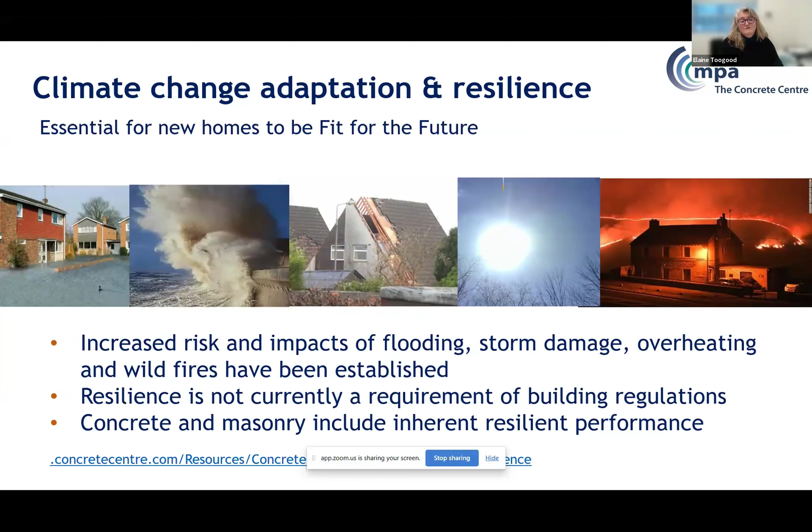But of course, quality, performance and sustainability isn't just there. There's a wide range, and we need to be reducing carbon emissions in new homes, through energy use but also through embodied carbon. That embodied carbon piece is, as you might expect, a real driver for innovation with regards to concrete. It's a big area that I'm going to be looking at in this presentation.

There is a huge amount of innovation taking place right now with regards to reducing the carbon footprint of concrete. Hopefully you're all aware there is a UK concrete and cement industry roadmap. It's been around for a few years now, published in October 2020, already building on good work that was already in place and in action. There's been good progress right across this whole range of seven technology levers that have been identified, all necessary to achieve beyond net zero by 2050.

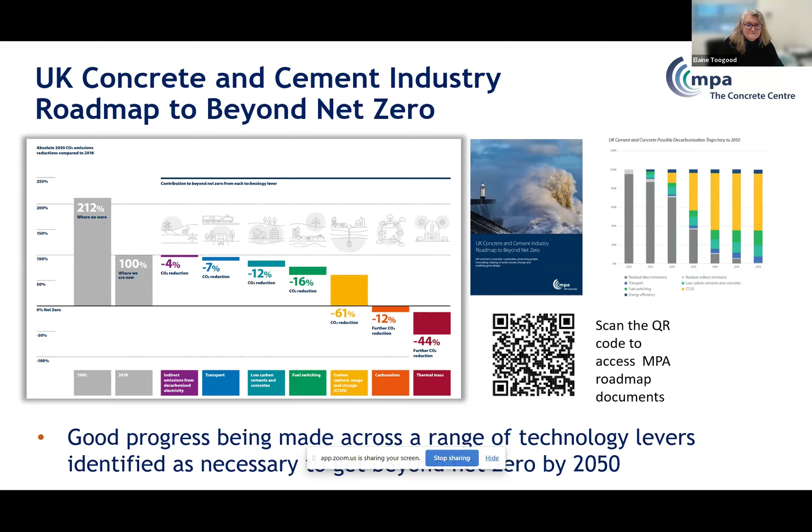So far, a 53% reduction in carbon since 1990 has been achieved by concrete in the UK. Of course, there's still more work to do, and there's going to be an update on progress published very soon. You can get a lot of the details about those different technology levers through the QR code on the slide. It's impossible to go through all the different action and innovation taking place, but I wanted to draw your attention to an article published just under a year ago. It's still a really good one to look up about the range of different things going on within the UK, and you can pick this up from our website.

In this presentation, I'm going to run through probably 5 or 6 themes of decarbonisation activity that's going on. So we'll do a quick fly through.

The first one is innovation in manufacture of Portland cement. Cement is the main thing that brings embodied carbon to concrete, so there's a lot of focus on activity related to cement. Aggregates, which are most of what concrete's made out of, are actually incredibly low in carbon and usually locally supplied.

In the manufacture of Portland cement, about 30% of the carbon associated with that is a result of the fuels being burned, since really high temperatures are needed. So fuel switching is one of the areas of early intervention the industry have been looking at. The latest figures available in 2022 show about 50% of the thermal input was provided by alternative fuels, a lot of them based on waste-derived fuels, switching away from fossil.

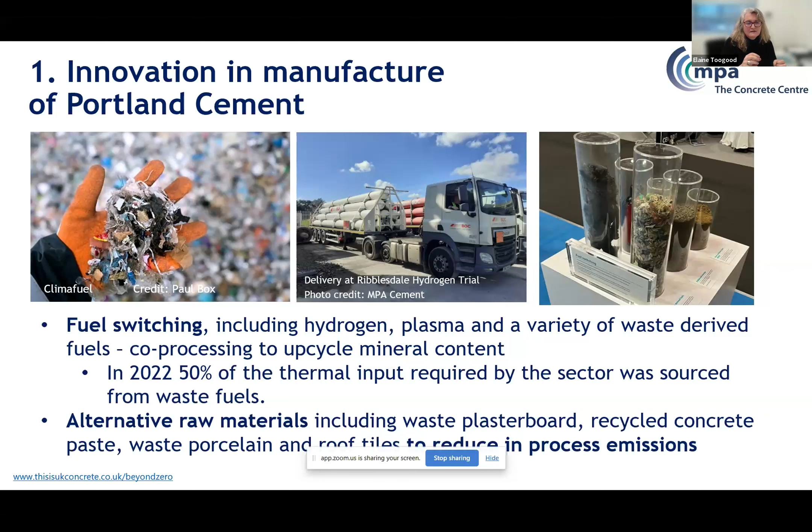It's not the only area of innovation with Portland cement. The other is alternative raw materials in the making of it, including waste plasterboard, recycled concrete, waste porcelain, and roof tiles, all to reduce those in-process emissions, changing the recipe of the making of the cement so there's less carbon produced in the process.

Now those process emissions are there due to the chemistry of making Portland cement, and at the moment they account for around 70% of the overall carbon emissions associated with it. So these are going to need to be captured - carbon capture, use, or storage is going to be necessary to reduce these.

A few years ago, this technology and innovation was seen as being quite futuristic, and a lot of people didn't really think it was coming off, but actually there has been significant recent progress in this. At the moment we are on track for the UK's first carbon capture cement plant to be up and running at Padeswood by 2029. Really exciting and really significant progress there as one of those levers for decarbonisation.

There are lots of other sites as well that have been identified, and there's a large amount of international collaboration to develop the technology for CCUS.

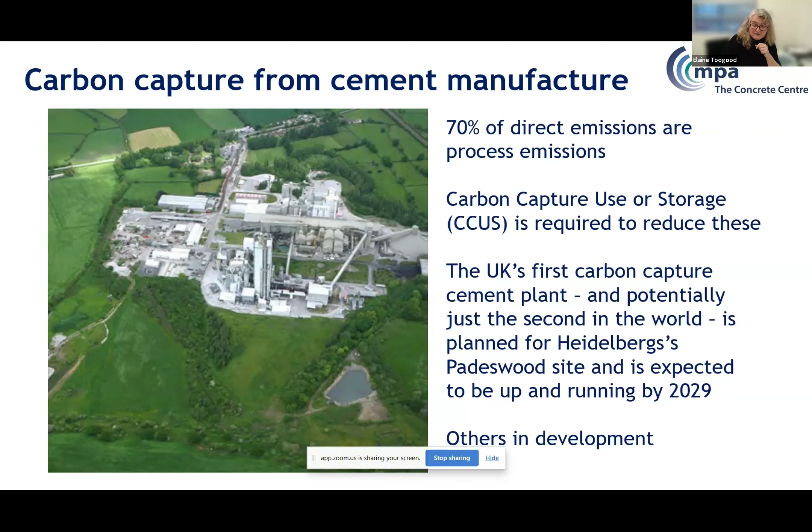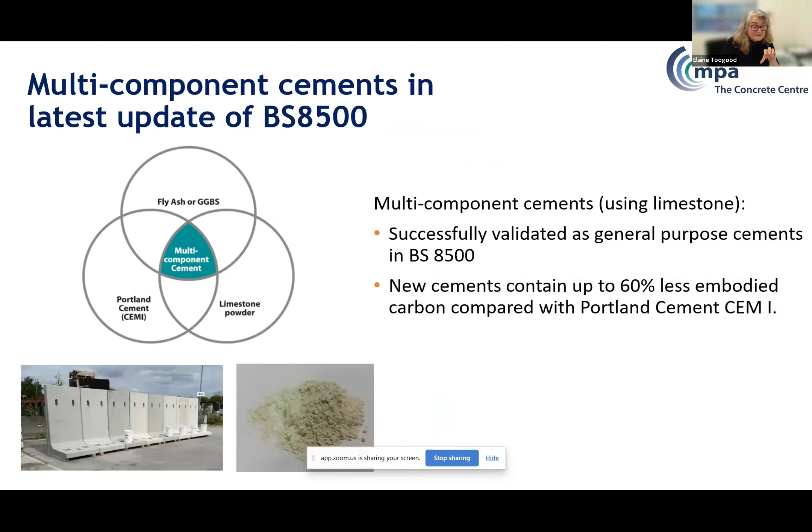The other area is in lower carbon cements and concretes. This is a hugely exciting area of technology. Recently there's been new cements available through BS EN 197-5, using limestone, which is less carbon - a different way of blending. There's different alternatives to reduce the amount of Portland cement by using limestone and either GGBS or fly ash.

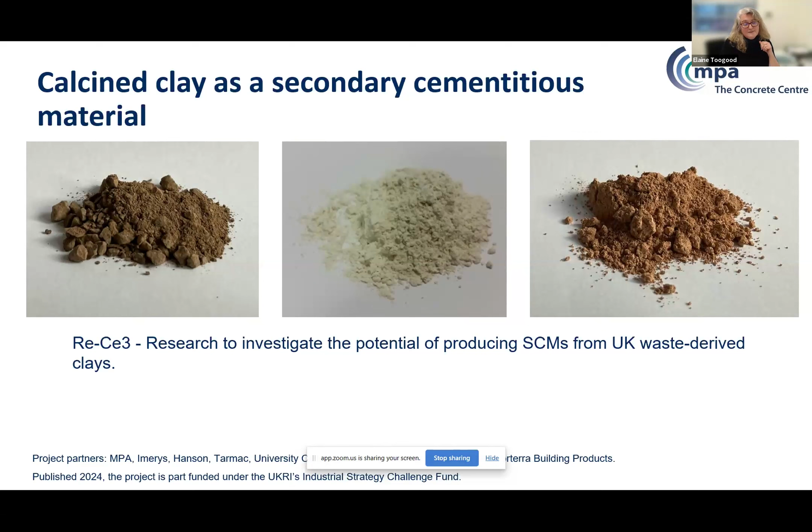Calcined clay is hot on the heels of that. There's another government-funded project that MPA have been running, looking at UK sources of reclaimed clay to be calcined and used as a potential alternative for expanding the range of lower carbon concretes available.

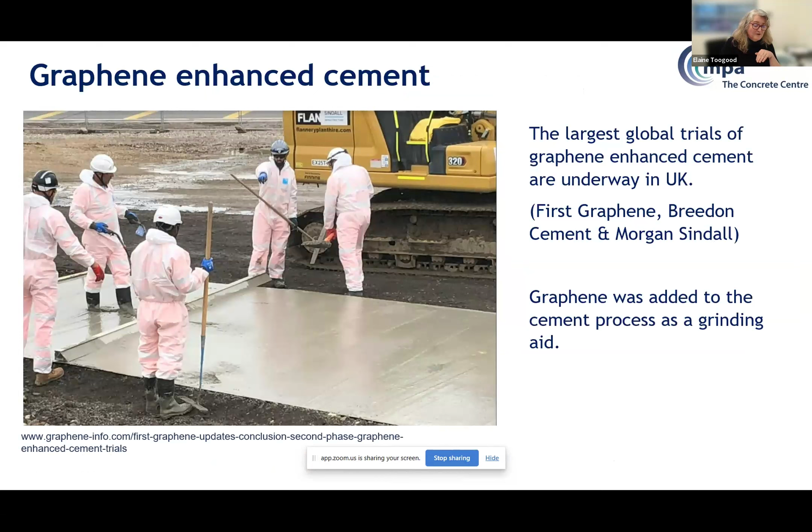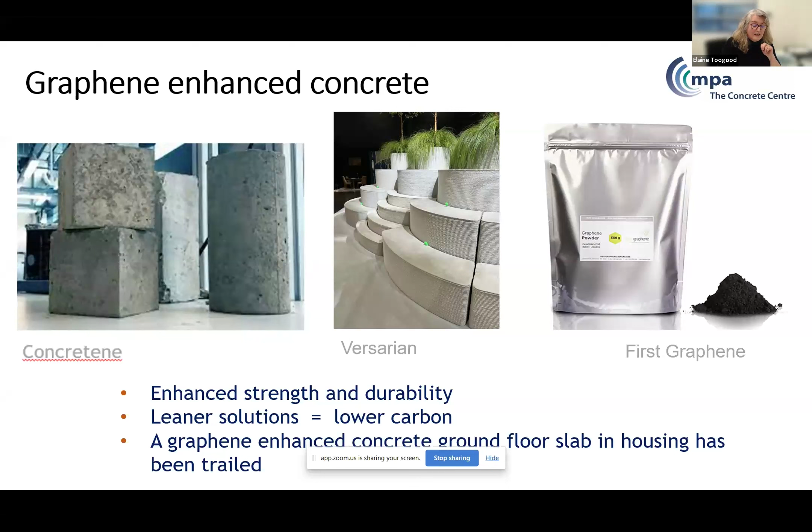Graphene enhancement is another area of interesting use. It improves the durability and strength of concrete, potentially providing leaner construction, so less carbon - whether in the making of the cement or as an admixture. There's some really interesting work done by a variety of people, and in fact there's been a concrete floor slab trialled in housing in the UK, as well as trials by some precasters using graphene enhanced concrete.

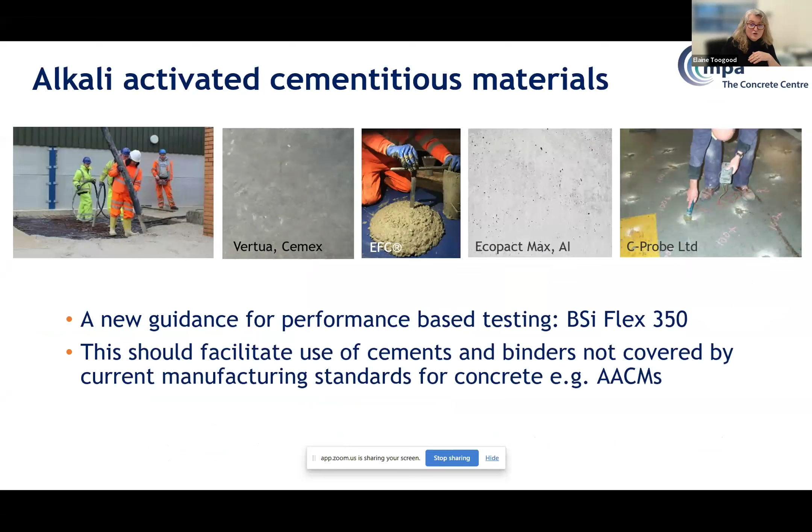There are alkali activated cementitious materials, another form of binder for concrete becoming more available, and there's a new BSI Flex guidance that's been provided to help and facilitate the use of these types of cements, which are non-standard and not covered by current concrete standards.

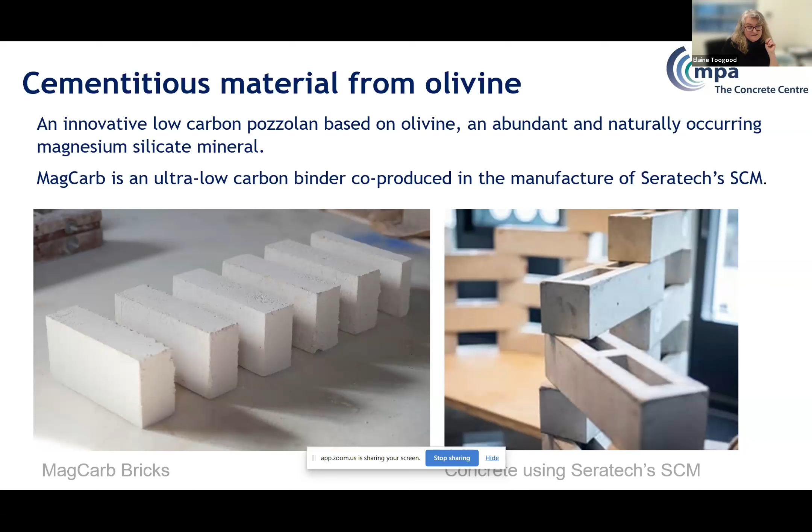But there's also research and some trials starting for different technologies, different bases for binders, including Seratech's use of olivine as a raw material - a completely different technology as a basis for cementitious material potentially usable in concrete.

There's also new uses for recycled concrete, a really interesting area of activity - whether that's crushing the concrete at the end of its life to tap into its carbon capture potential, enhancing aggregates for use within concrete, or brand new concrete products being developed, such as that produced by Cambridge Electric Cement.

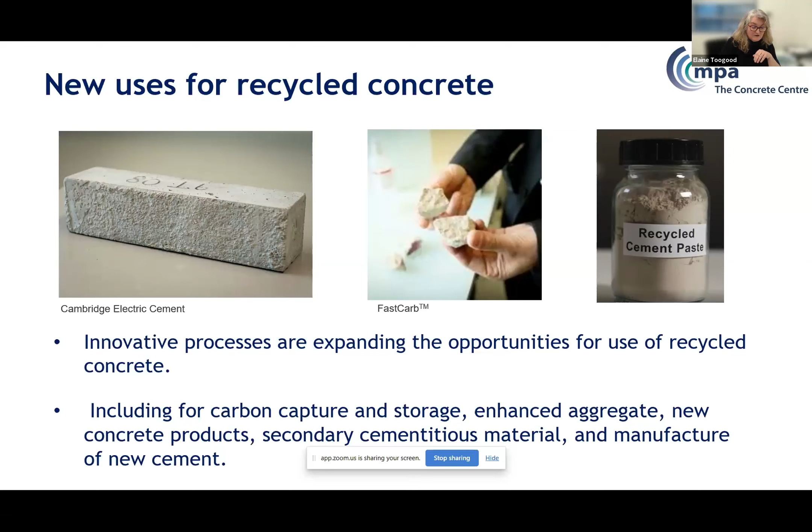There's also potentially lots of research going into recycled cement being used as a secondary cementitious material and in the manufacture of new cement as well. So a very exciting area of work that's going to reduce the carbon footprint for all concretes potentially, and that would impact on reducing the carbon footprint of housing in turn as well.

Another area is innovative industrial carbonation techniques. That's about actually permanently embedding captured CO2 into the concrete as part of the manufacture. It's another area of work.

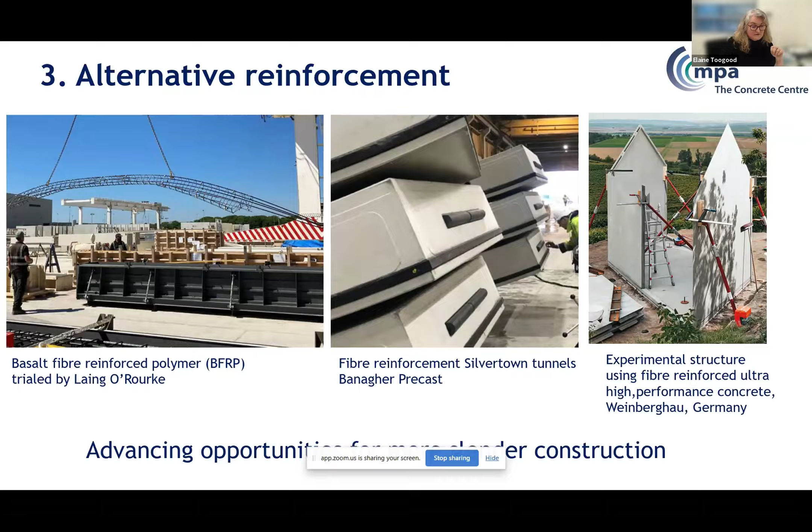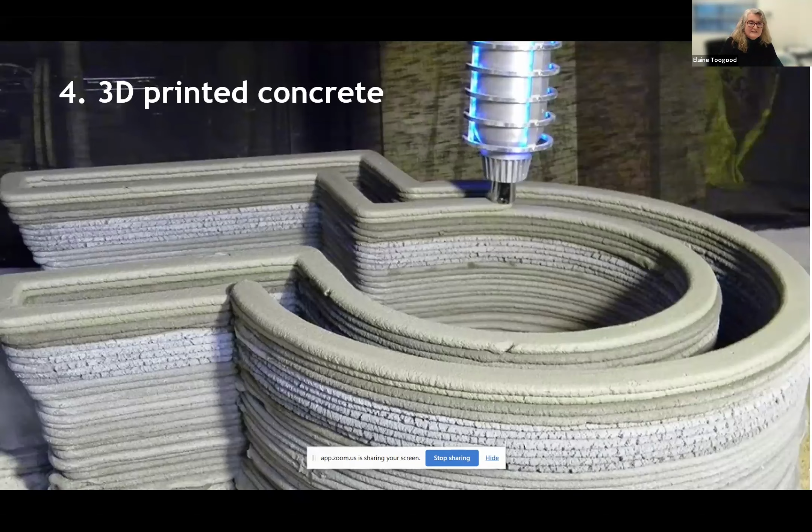There's so much more we could be talking about, but we don't have time. So the third one is alternative reinforcement. Really interesting—if we can get alternative reinforcements in there, there's real potential for leaner forms of construction. There's lots of research taking place by MPA members of precast looking into getting more slender solutions by alternative reinforcements. 3D printing, everybody—obviously that's usually the first thing people think of when they say, I'm looking at innovative concrete. It's a completely different way of transforming how we place concrete as well as make it.

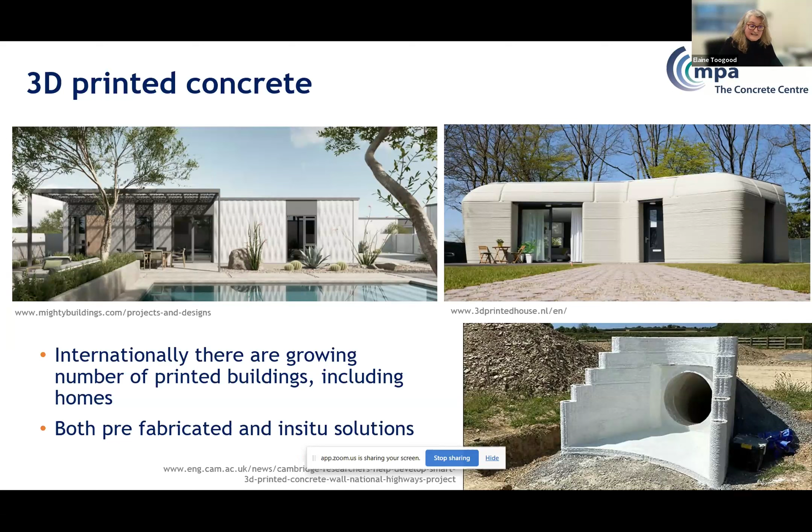Now, in the UK at the moment, there haven't been any homes built with this, or certainly not that I'm aware of—if anybody knows, tell me. But there has been a growing number of printed buildings and homes internationally, including both prefabricated 3D printing and in situ solutions. In the UK there have been some trials for infrastructure—this really complex bit of concrete that's been installed in Cornwall in 2023, and some other inspection chambers and things being manufactured. So it's a really interesting area of evolution, and I'd be remiss not to include it in this talk.

But my final and fifth innovation relates to digital technology. This could be AI and machine learning in manufacturing and construction. I'm not going to go into great detail because Dan is going to focus on some of the ways the PC have been using this within construction. But it's a really important area and thread for enabling other technologies as well—whether that's about digital sensors being embedded within the concrete at the point of curing to facilitate early striking of some of these lower carbon concretes.

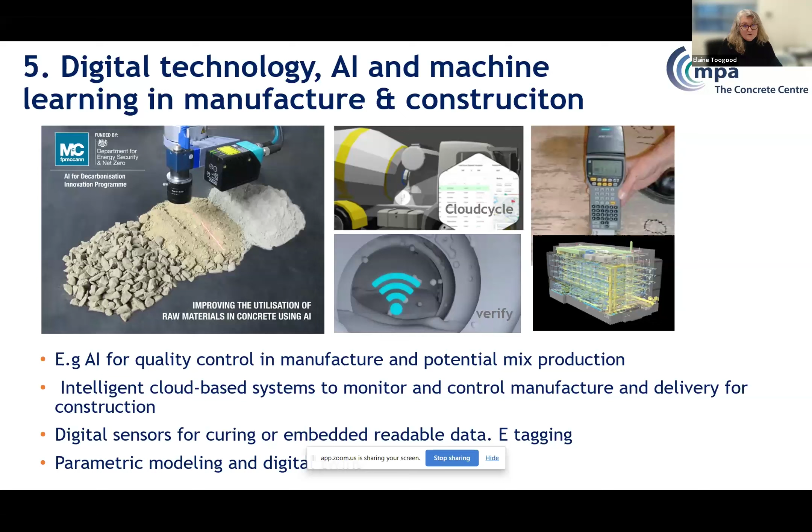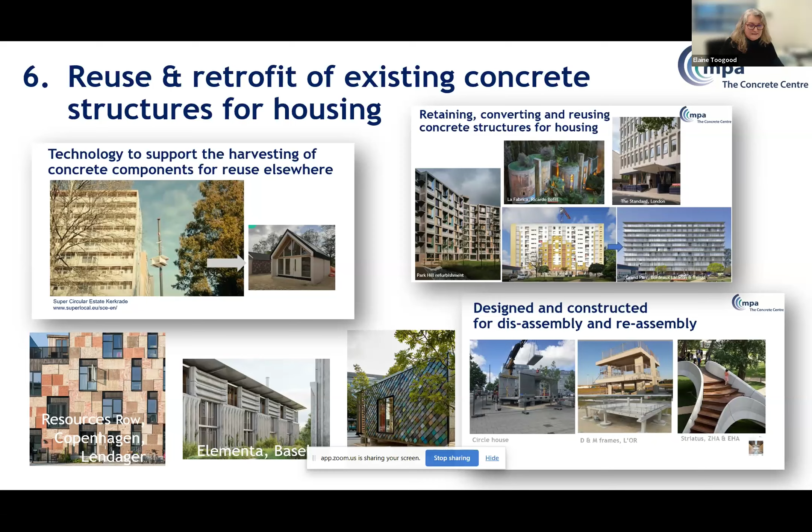I'd like to, but don't really have time to go into other circular economy areas of interest. But I just wanted to put this one in because, of course, if we are going to be tackling this housing solution, we need to get better at reusing the existing structures that we have right now. There's lots of really exciting stuff going on in terms of ways we can be harvesting existing concrete components, retaining and converting structures, and designing in the first place to enable their longevity or disassembly and reassembly. So it's a really exciting area of research that can impact on the way that we build homes.

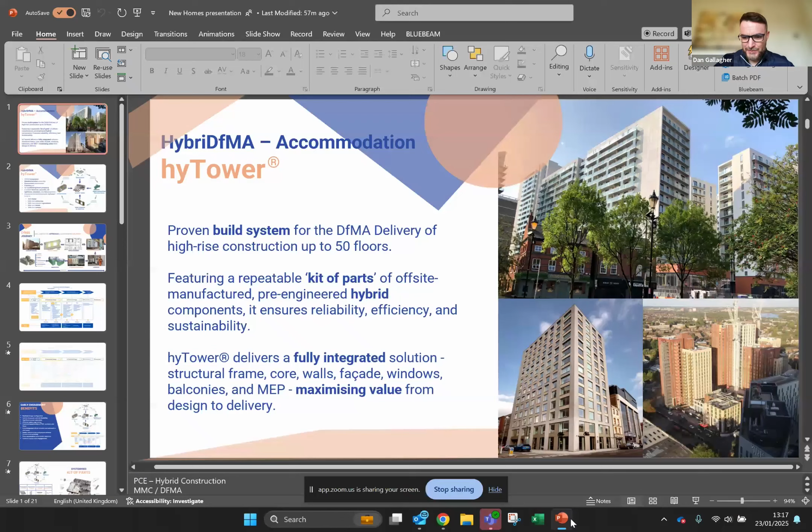Okay, thank you very much. Thank you for the invitation and opportunity to talk today. As Elaine has alluded to, the housing crisis dictates lots of different solutions, and we're just going to give you a snippet of what our solution looks like and how we bring accommodation utilising hybrid DFMA solutions. So our solution for this is something called a hyTower solution, which enabled us to develop and bring high-rise accommodation utilising a kit of parts approach.

For those that may not be aware, hybrid DFMA is the blend of a lot of precast concrete, which is what we have historically done, but utilising lots of different materiality as well in order to bring the right solution to the project. DFMA is designed for manufacture and assembly, which knits quite nicely into modern methods of construction, or MMC as it's predominantly called, where units are manufactured off-site, brought to site, and then ultimately put together like Lego. Traditional building obviously has a place, but this is a more modern form of construction which addresses a lot of the concerns that Elaine mentioned, particularly with regards to acoustics and thermals and things like that.

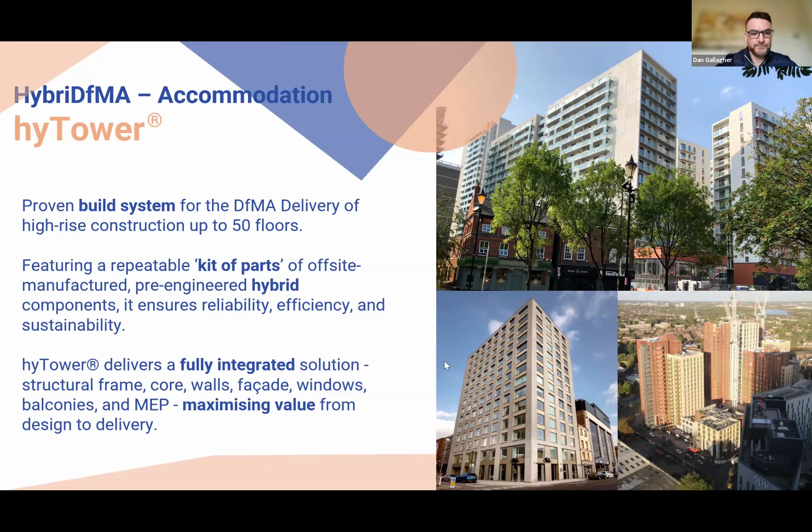So a little bit more about the hyTower system specifically. It's founded on a kit of parts approach, as I touched on. We pick our units from a systemized library. We then utilize digital technology to track those units throughout the concept design stage, into detailed design, throughout the manufacturing processes, and then as they get to site, tracking where they go in and where they get installed, along with all the QA around that.

This is in order to make sure we've got that golden thread and single source of truth, which I'll touch on a little bit later. As I've already touched on, the thermals and acoustics are a natural byproduct of concrete, and we like to think that we also bring a lot more to the party in terms of air tightness. So passive house standards are something we can achieve using our system, as well as deploying it in areas like hospitals or research facilities that have high specifications for things like vibration.

What we tend to find is that over traditional builds, we're up to 50% faster in terms of on-site activities. It does dictate that a lot more work has to be done off-site earlier, so that sometimes changes things like funding models, and people have to come with the right type of mentality in order to deploy a DFMA solution. But we're also then able to deploy fewer deliveries to site, reducing carbon footprints and disturbances to neighbours in tight inner city areas and what have you.

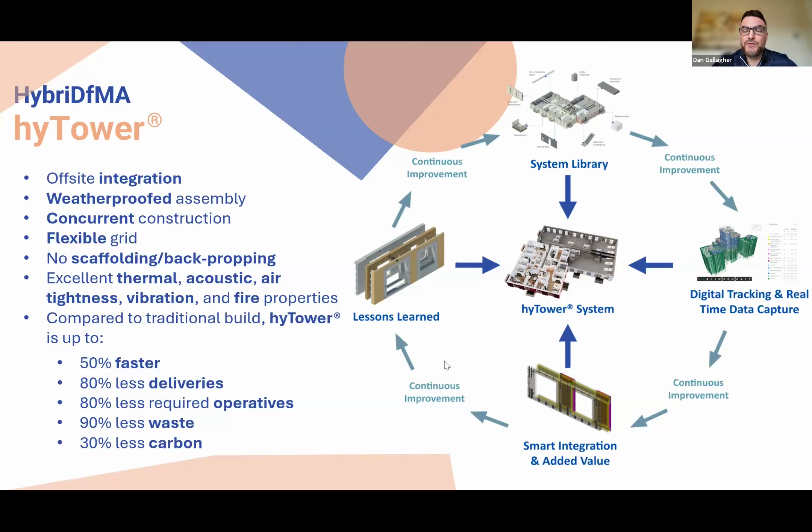So as a brief overview of what this DFMA journey looks like, we like to get involved nice and early, as I've touched on. That enables us to talk to the client team and the wider design team, and ensure there's no decisions taken which funnel us down the wrong avenue, where we're trying to put a square peg in a round hole with regards to a traditional build versus trying to deploy a DFMA solution as best we can.

We do a spatial design in order to make sure we're hitting the architectural and engineering intent, and then move that through stage 4 into detailed design, at which point we produce shop drawings. That goes into a manufacturing environment where those units are produced off-site, QA'd, and tracked digitally until it's ready for on-site, transported to site in a controlled fashion, in line with the build sequence that has been pre-developed.

And then we have the lifting and installation sequencing on site, which is a systemized approach, enabling us to hit cycle times that often start a little bit slower. But once everybody understands how things come together and the predictability factor kicks in, those cycle times decrease over time until the building is complete. And then we have the handovers for the end client.

And because of that digital twin technology which we deploy and that traceability, the birth certificate that stays with every unit from the spatial design stage right through to the handover stage will track everything from the materiality, who manufactured it, what's been cast into it if it's a precast piece of concrete, all of the structural tie connections, if there's any remedials, and its specific geolocation on site, so that everybody understands the full history of that unit until it's in its final resting place.

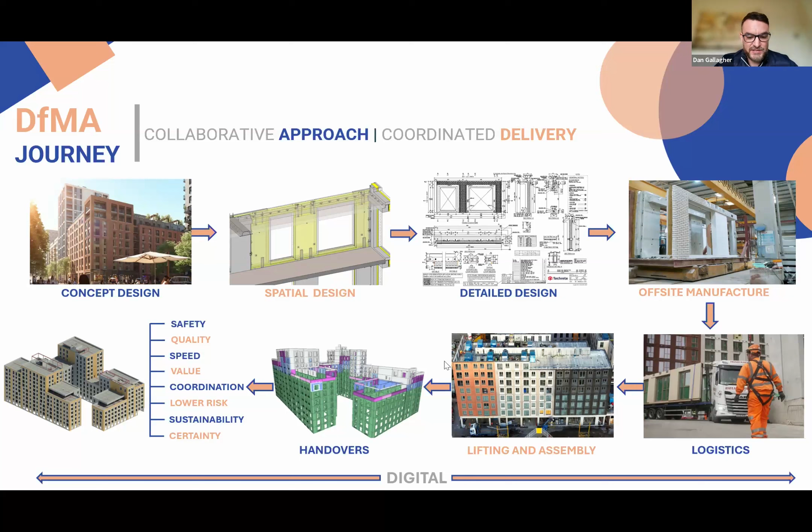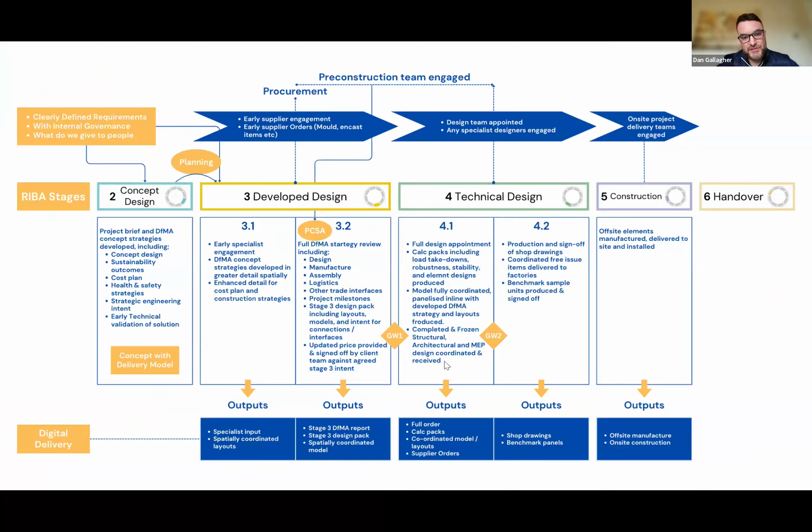So this is, for those familiar with it, the RIBA stages of work. Most people are familiar with these stages, so I'm not going to go into too much detail, but the thing I really want to hone in on is that whilst people understand the RIBA stages of work, not everybody is aware that there is a DFMA overlay for the RIBA stages of work, which is specific to deploying an offsite strategy.

We feel it's absolutely key that we get involved as early as possible in order to fully harness all of the benefits of a DFMA strategy, so that we can then go through the developed design, the manufacturing strategy, and the on-site assembly strategy with all of the positives that can be deployed from an MMC solution.

As I've already touched on with some of these benefits, we do optimize the design. We feel we can look at other avenues, as Elaine has touched on, better forms of concrete where it's practical. We can look at reinforcing, or only providing reinforcement in areas required based on the strengths needed, rather than traditional reinforcement everywhere that might be to a particular standard. So that enables us to really drive down reinforcement contents.

We've got the waste reduction, which I've already touched on. We value engineer, which is often something that is challenging on a project when people are trying to drive down costs or understand how they maximize what they're paying for.

That added value and coordination piece enables us to cast things into our precast products that then facilitate follow-on trades. So we put the openings in our units that allow the ductwork to come through, that have been predefined, fire stopped. We have single risers that get dropped into place, so it's a single plug and play system. And we really do that by buying everybody into the team and being able to get them on board with that DFMA strategy.

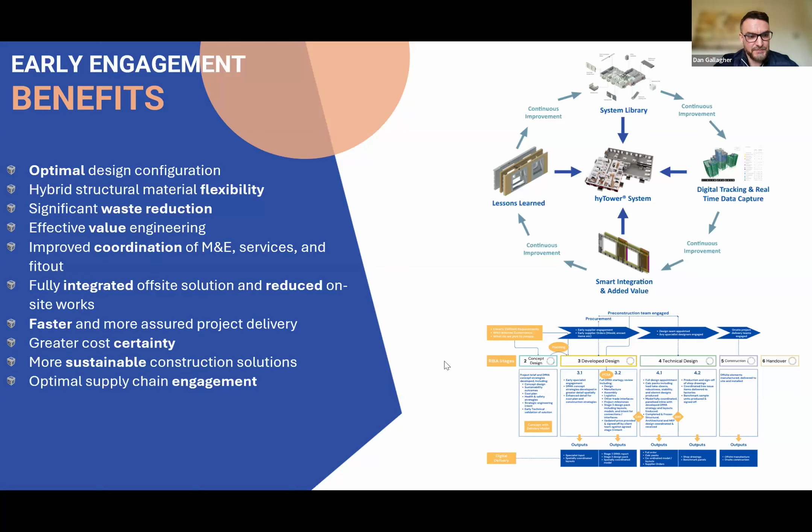The real strength of being a hybrid DFMA solution is that whilst inherently precast concrete has an awful lot going for it, one size never always fits all, unfortunately, and we recognise that. And because we don't own any manufacturing facilities, we instead rely on the supply chain and the good relationships that we have. We're able to procure the products we need and put them in the right place at the right time, so that we're putting our best foot forward for project delivery.

So that sometimes emanates in terms of precast concrete beams and precast concrete slabs, but it could also be timber, it could also be composite beams. We're not really hamstrung by doing it one way. We instead look at all the credentials of pulling all of the kit of parts together in order to get to the best solution possible.

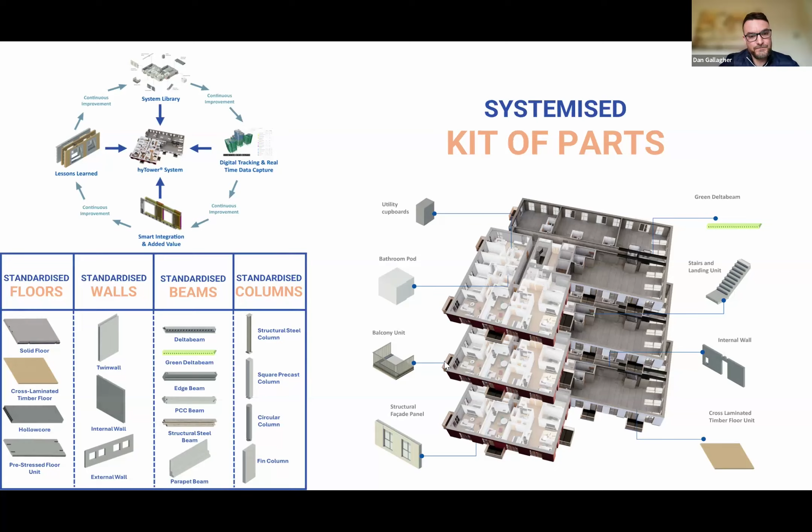That systemized approach and the predictability it brings means we're picking things out of a catalogue that have been tried and tested. They've been through thermal, fire, water, acoustic testing, air tightness and vibration testing, and we're able to demonstrate, validate and verify to our clients that what they're purchasing is fit for purpose. And we have all the traceability throughout the digital twin tracking in order to justify that.

The integrated systems, the facades can be brick, concrete, coloured concrete, or patinated concrete. We're able to install the windows into the panels as well, which gets away from any scaffolding around the outside because it's an integrated part of the system.

Integration with the MEP, as I've already touched on, casting things in or facilitating underfloor heating being in place, so it's just tested on site rather than off-site. And then we can drop in pods or risers while we're building, so we've got fewer trades on site. We're not bringing other people in, so the client only has to deal with us, and we're bringing that added value. We're also able to install things like balconies and roofing at the same time, which drives down that manpower on site.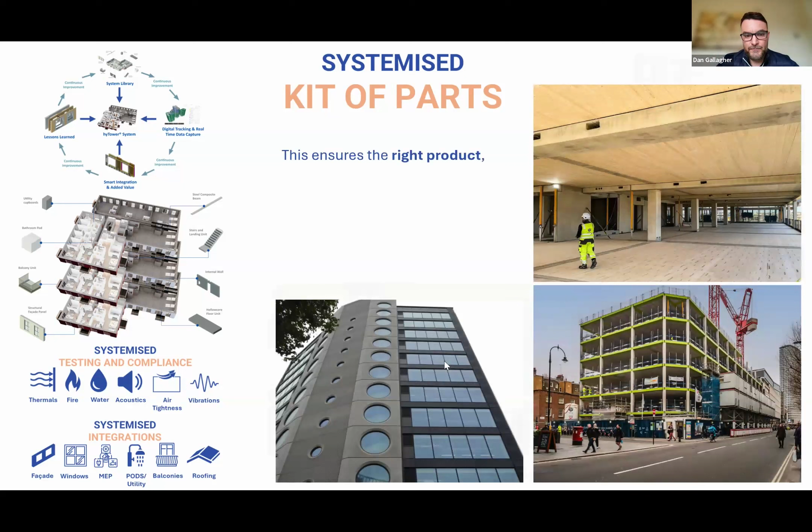So as I've touched on, that enables us to get to a place where we're putting the right products in the right place, doing it to the right standards. We have data backing up our solutions, making sure they're fit for purpose and robust. As Elaine touched on, we want solutions that can stand the test of time.

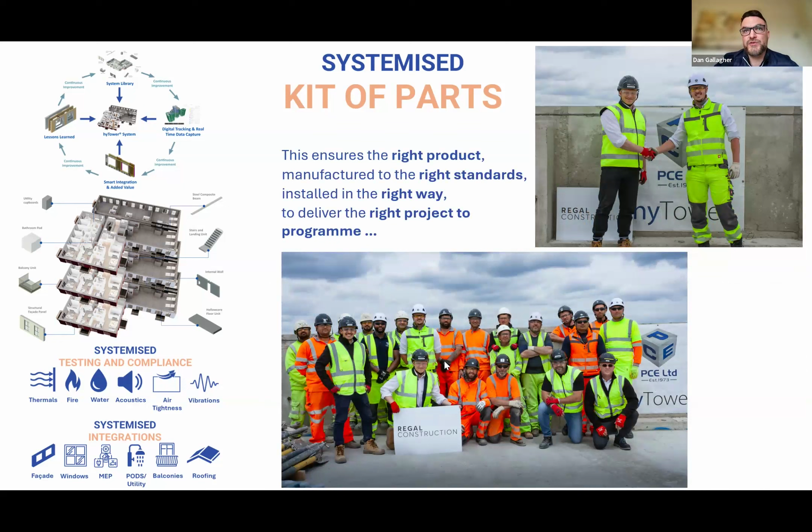And then we're able to track it all and provide transparency to our clients through digital traceability. So just touching on that digital twin visibility, this is something we've developed in-house because we're absolutely adamant that we don't just want to utilize it for our own benefits. We want to give that transparency to the client team so they understand whether we're on program, where problems might be, but more importantly, how we're progressing with regards to the program, so they can start thinking about those follow-on trades in order to reduce the overall times for on-site activities.

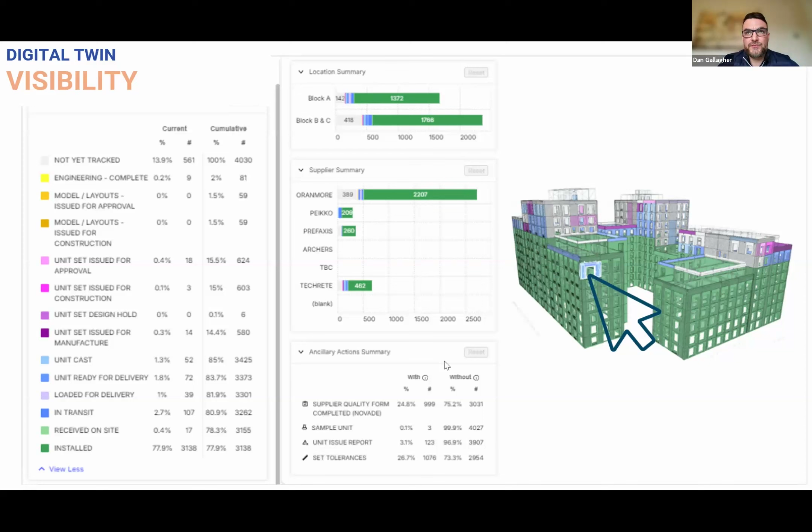And we do that using a system called Winomia, which takes elemental pieces of the overall structure and tracks them throughout the design process, the manufacturing process, and the on-site process. So in this instance specifically, we can click on one unit and have the full history of that unit with regards to the journey it's been on through its manufacturing and design process until it gets to site.

This is all done in a digital twin. So as people are quite familiar with 3D technology these days, you can rotate, zoom in, find the unit specifically you're looking for, click on it, and it will expand out, giving you imagery with regards to that journey it's been on, and all the details about it.

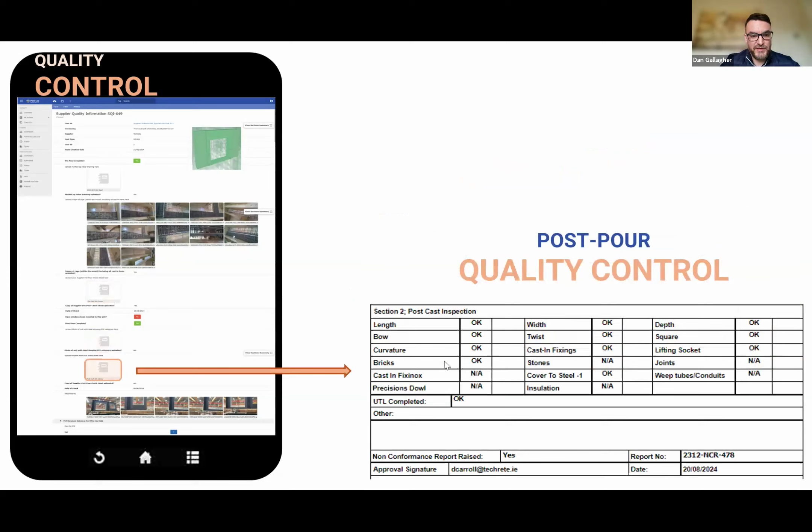And then it can give all your documentation that sits behind it as well, whether that's the quality control, the photos, or the sign-offs, just to validate that it's ready to come to site and can be installed. And that's the full digital twin technology throughout all three parts of the project: your design, your manufacture, and your construction.

And we really feel that in order to do that, if ever we need to come back and find information through O&M manuals, rather than trying to find paperwork or individuals, it all resides within a 3D environment where people are free to go and find that information, whether it's design related, quality related, structural integrity, or fire related.

So all of that enables us to have a single source of truth which aligns to Gateway 2, making sure everybody understands where they're going in order to find the information they require for their project. It's visualized, so it's easily accessible. Throughout project delivery itself, it gives real-time insights and visibility client side, so people can understand how their projects are progressing. And that enables us on site to have a comprehensive management tool for understanding where we need to focus our attentions at any given time.

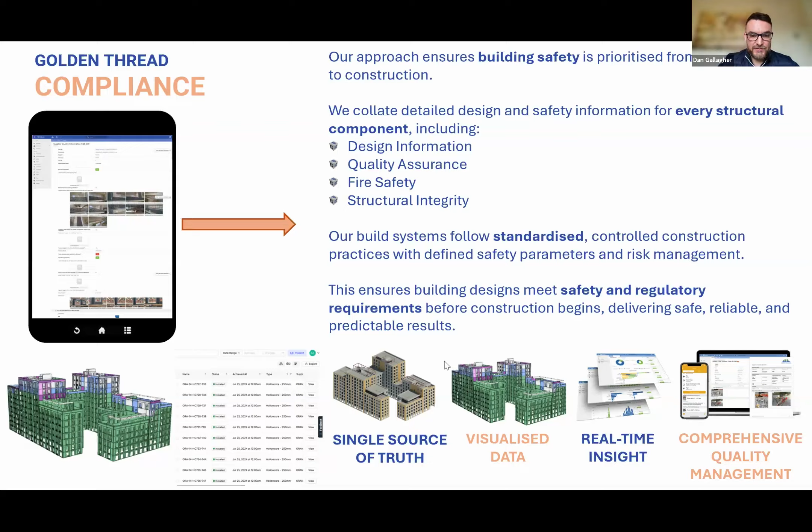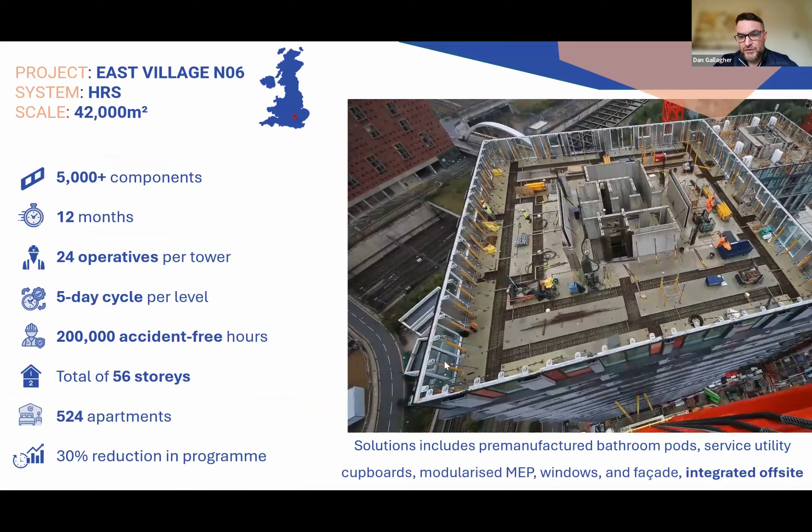Just a few working examples now. This one is a project that has already been delivered. The video on the right-hand side demonstrates those cycle times I spoke about, with the repetitive nature of things being installed. You'll be able to see the core in the middle, and you can see some pods being dropped in with that added value piece.

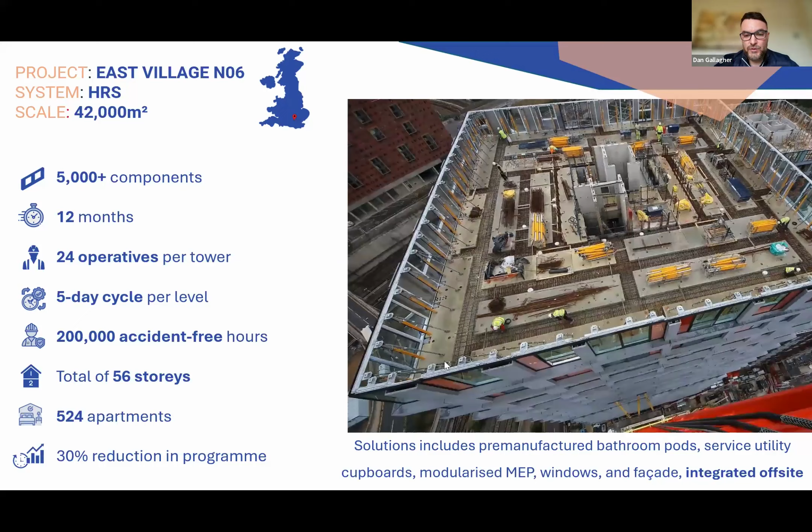This is a high-rise residential scheme called N06, East Village in London. This had over 5,000 components and took only 24 operatives to build, delivering 524 apartments. Over the original scheme, which was an in-situ scheme, the client confirmed that we were 30% quicker than if they had gone with a traditional build solution.

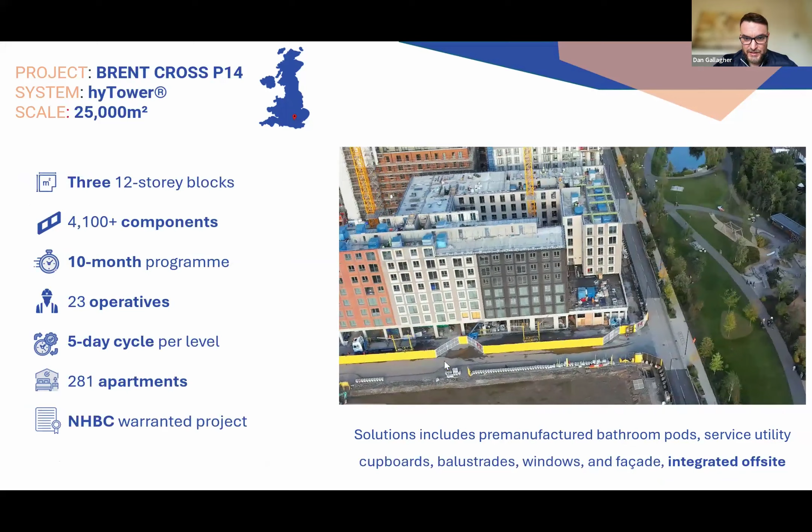Again, this is another residential scheme. It's currently being built and we're just completing it down at Brent Cross. You can see the various different facade types that we've got on it. So this is really us being able to maximise the architectural intent that the architect was trying to achieve.

As we pan around to the right-hand side, you can see more traditional builds on the right-hand side versus the building on the left-hand side, which is ours, where we don't need external scaffolding, we don't need the vapour barriers, and we don't need brick slips being installed after, because that's all part of the integrated solution.

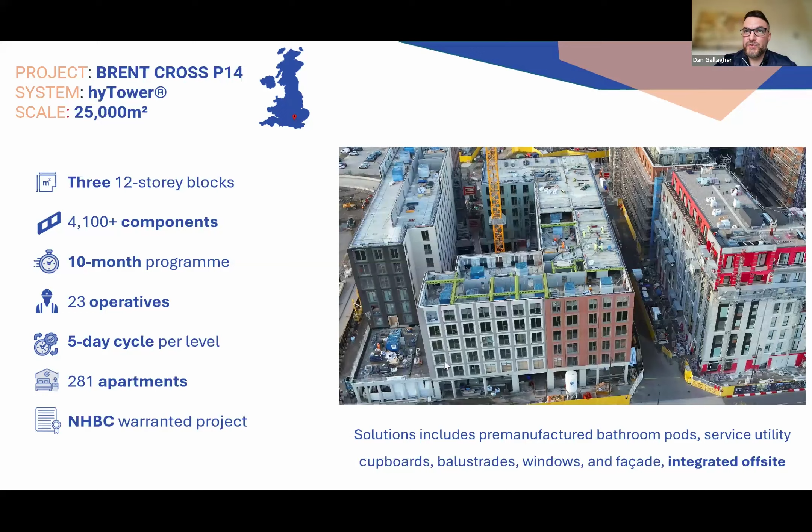This was a 10-month programme. Again, only 23 operatives being delivered on site. It was NHBC warranted, so we went through a lot of testing with regards to air pressure, wind, water, again, as Elaine touched on, making sure that it's a robust form of construction that the client was looking to procure from us.

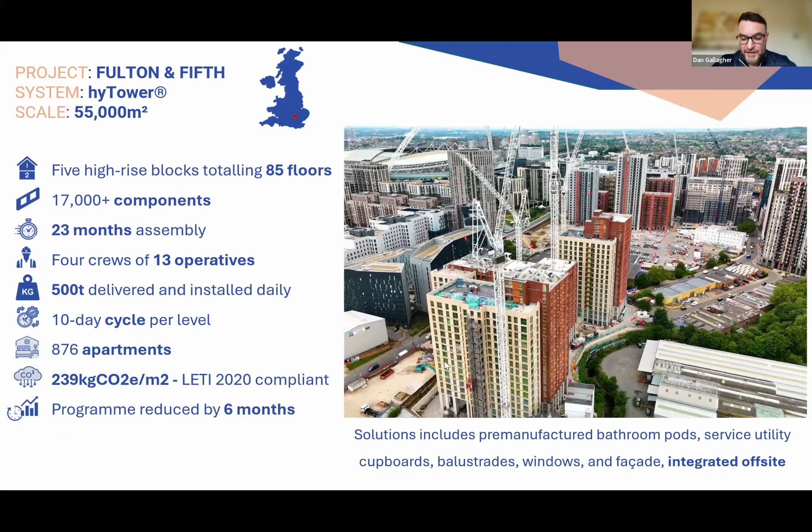Again, another project in the centre of Wembley. We've got the Wembley Arch in the background. This is five towers that we're currently delivering. It's a 10-day cycle typically for being able to go from level to level. So we've really refined the ability to build with speed and certainty.

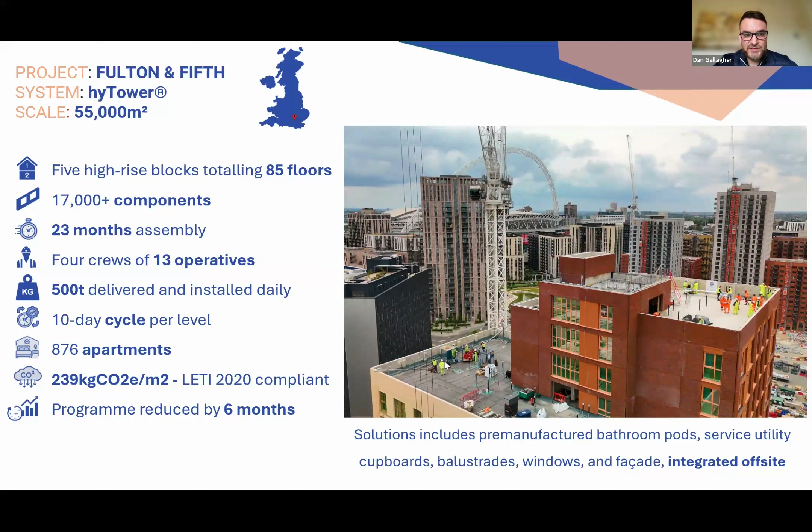And we're on site for about 23 months, installing just over 17,000 components. And then finally, just a bit of a digital representation there on the first image, and then a cycle showing how we've delivered a project called Silvertown Plot 6. This encompassed some affordable accommodation as well as some shops and office space and what have you. So there's lots of different ways that we can try and answer this housing crisis, and we've got a lot of solutions in hand and innovation that's ongoing in order to try and do that.

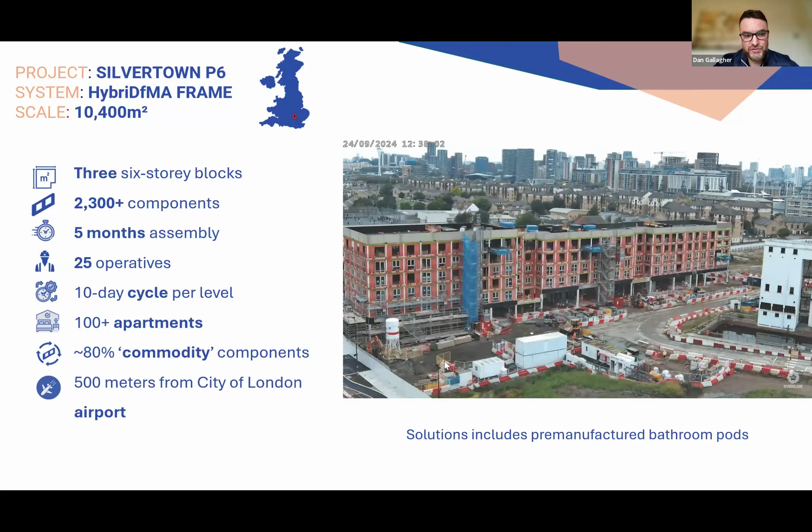And that's me. I'd be more than happy to take any questions. Thank you for your time.

Thanks, Dan. I think that was brilliant. Lots of really good stuff there. I think Laura might have dropped off the screen, so I think it's going to be you and me having a chat about this and seeing if we can answer any of the questions that have come through. So I'm just going to have a little look.

It's very impressive when you just add up the number of homes that were just on those three projects that you talked about, and therefore how fast they were being delivered, as well as that quality that we were talking about before. Yeah, that's very impressive.

So there are a couple of questions in here. Somebody has asked about the challenges and opportunities for DFMA, but they're specifically asking about the research challenges. So I'm not sure if that's related to what the research is, but there obviously are challenges and opportunities. So if you were going to advise somebody who was thinking about doing it right now, what would be the first thing you would say to them in terms of limiting or overcoming some of those challenges of implementing DFMA on a project?